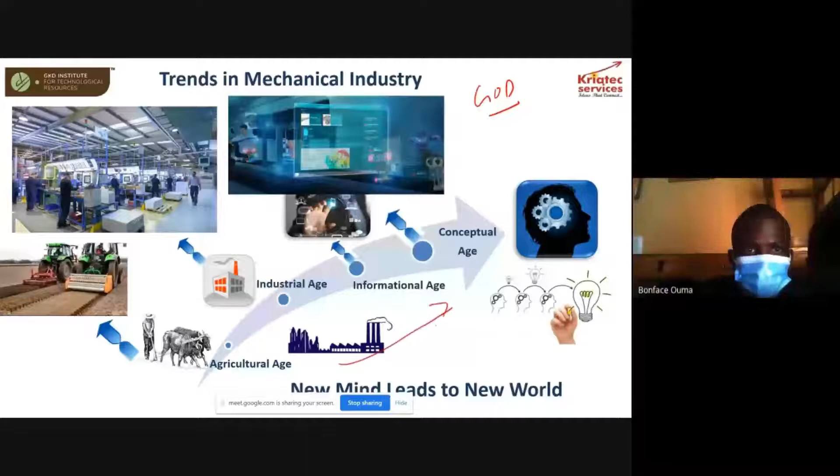Basically, you take anything - maybe starting with CAM, or maybe banking, any area you take - it's the information age that started.

Today, in 2020, we are into the conceptual age. As Mr. Bala rightly pointed out, we are into the pandemic age. Earlier, to identify or invent a vaccine, it would take a decade, 10 years. But today we are able to produce one within a year, and that's not applicable only to the pandemic situation in the medical field.

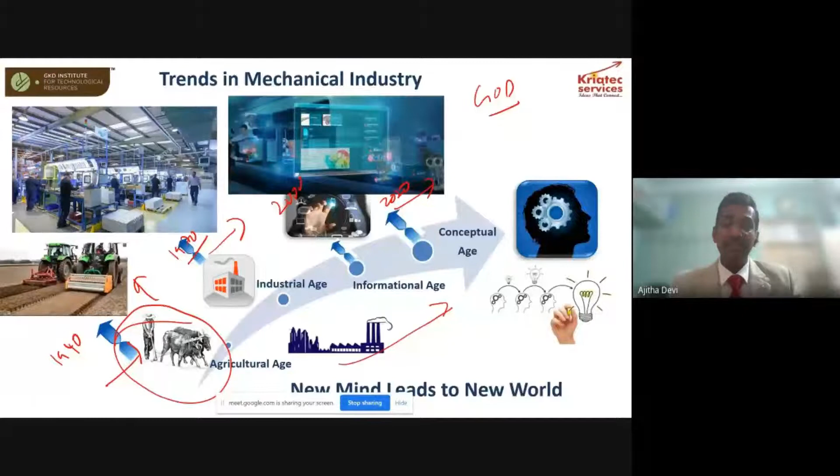If you take any field, you are into the conceptual age. If you have an idea, the same can be manufactured. Mechanical engineers are really great here - if you have an idea, it has to be produced. It's called a product. How can you produce a part? That's called new product development. You have the idea, you've done fantastic design engineering, a CAD or an engineering drawing - everything is made. Then it has to be produced as a part. The parts can be manufactured in various methods, but predominantly industry uses four types.

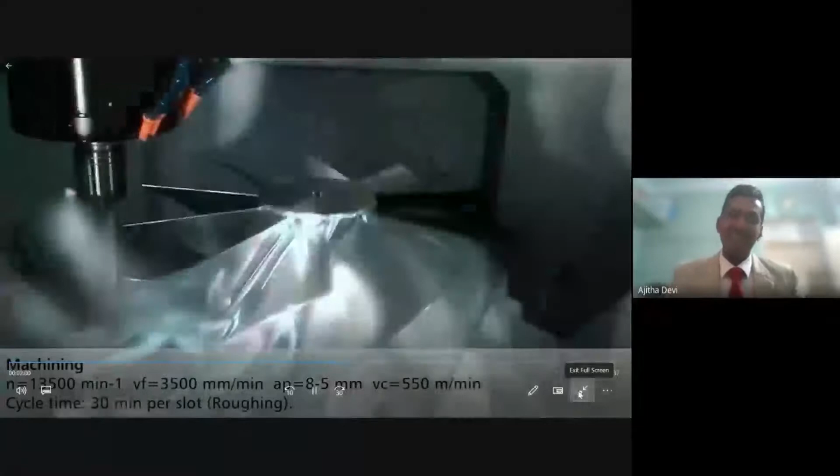Then metal cutting - I'd say around 70% of the industry uses metal cutting. Let me show a small video of the latest trend, what we call 5-axis and all the latest technologies. Generally, people still do the rough machining with a basic 3-axis machine, and in finishing applications like 5-axis, you cannot apply more load - it's only for finishing. So these are some common things you can never eliminate, still needing 3-axis. You can add 5-axis, but it's very important to keep a basic 3-axis machine too, because you cannot give more load - imagine on 5-axis, all the clutches would be free. So that's very important. When you're into modern manufacturing, you have to be careful and always remember some basics.

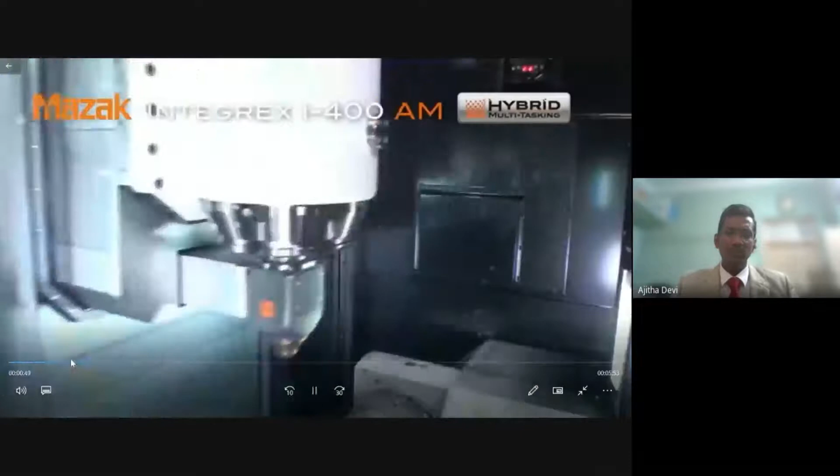The third method is metal forming - CNC punching, turret punching, a lot of progressive dies - and that could be another 20% of the market. Today the latest technology is called hybrid manufacturing. I call it the marriage between method one and two. It started coming up, and now in Europe it's very famous, and very soon you'll see it everywhere in the world. That's what I'm going to show you now, how the concept works. Earlier, both methods were separate; now they've married both, and it's called hybrid manufacturing.

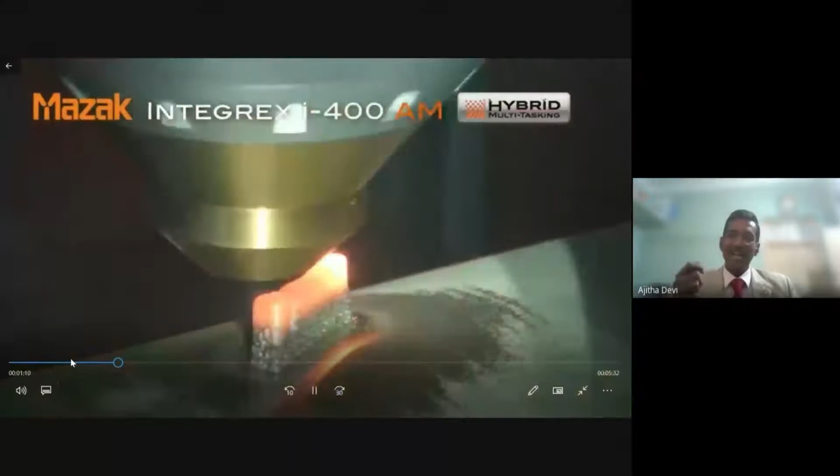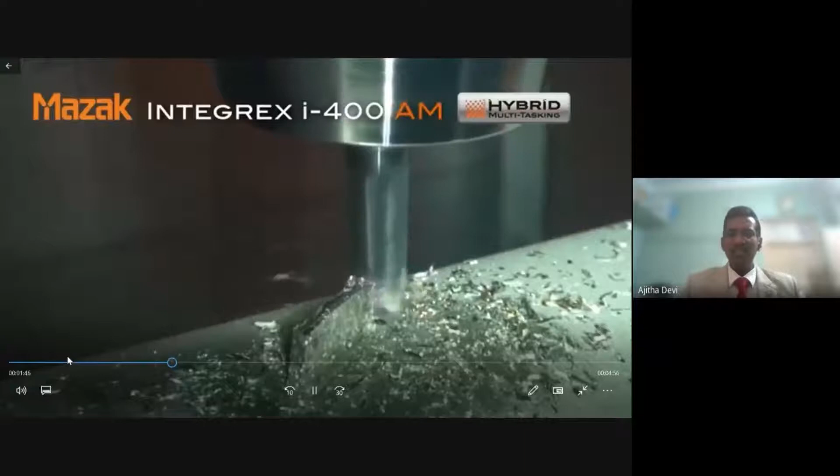There is a lot of investment, a lot of R&D going on in this, because this moves the way in which we manufacture parts. Earlier, as I said, we had to work within boundaries - we can't always call ourselves mechanical engineers and still work within boundaries, because we need to work with the machines we have. Just imagine, see this - it's now adding material, then removing it. I'm showing this as just an example.

A lot of machine tool builders started doing research on this. There are some challenges, definitely, but we have to overcome all this. The future is going to be hybrid manufacturing.

Today it's contributing around 5 to 7%. In the future, you can see it adds more into the conceptual age, as we're all moving into the conceptual age. You're adding material and removing material. Let me show this without spending too much time.

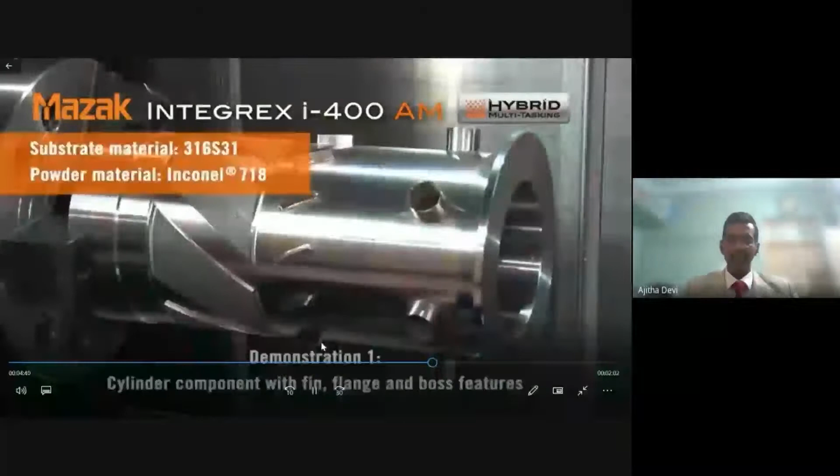This is a concept I'd like to explain. Let me show the outcome, finally, how it looks. This is the part. I'm moving this, see, this is the part. Imagine this part has to be manufactured using the traditional method, it takes time, and that's why people always introduce hybrid manufacturing.

As I said, this may contribute the balance amount of 7%. People expect this 7% to grow in future, depending on 12% to 25%, but it depends on how the industry takes it or what the industry challenges are.

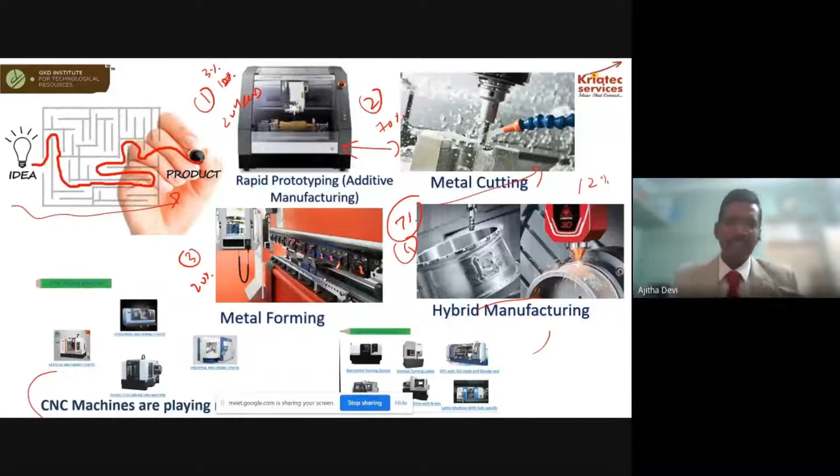At present, CNC machines are doing the major role. Now, if you want to produce a part in CNC manufacturing, what are the steps? I call this the 4-wheel.

Somebody is trying to say that you can try anything, but if you want to do new product development, you should have a 4-wheel. If one wheel goes down, you cannot produce a part. This is like a 4-wheel in a car, or any moving object, you need this. First is process planning, second is fixture design, third is cutting tool selection, and then CAM and SOP.

Let us go in detail. Let me put forward new product development challenges. I put this as the tip of the iceberg.

The reason is, if you are running a factory or working anywhere, people will see the outside. On-time delivery is a challenge. Rejection is a challenge. Whenever a customer asks for a product by tomorrow and you're unable to supply it, there's an unforeseen reason. It's not like something is wrong deliberately. If there's a rejection in your NPD, there are reasons, hidden like the tip of the iceberg, you can see all these errors.

Process planning error, more setup time, that's the reason you are delaying the part.

Unexpected accidents, imagine sometimes it goes and hits something, that's a challenge, and some sudden accident happens. Even as an entire humanity, we got hit by the COVID pandemic, and look how much time we are taking. Imagine the same way, if there's a car accident or an accident in the machine, it takes time.

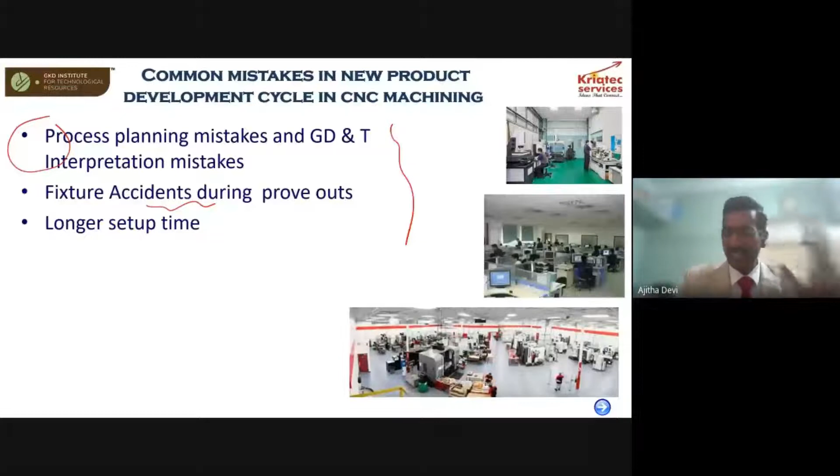Fixture accidents during prove-out, and longer setup time, that's a big challenge. How can you avoid it? Let me start one by one. We are trying to address all this, how you're going to overcome it.

That's the objective. I'd like to hand it over to my colleague Ravi, who is joining from Bangalore. Ravi sir, is it possible for you to take over the session while I move the slides for a couple of minutes? Definitely, sir, definitely. Thank you, sir, thank you for the opportunity.

I'd like to talk about this one. It's a simple flange coupling, which you can see in common valve applications as well as day-to-day regular manufacturing parts. In this drawing, how do we plan the processes? You can machine it both ways, either the top side as the first setting or the bottom side as the first setting. That doesn't matter, you can machine the part either way. But before deciding which side to machine first, you need to see the drawing carefully and understand all the important GD&T symbols given there.

You can see here datum A is given, so that is going to be the key here. With respect to datum A, they are trying to control the bore as well as the ID groove on this side and on the bottom side as well. So in this area, what I would suggest is, since datum A is given on the top side, I'll be machining the top side first, so that I can machine that particular area.

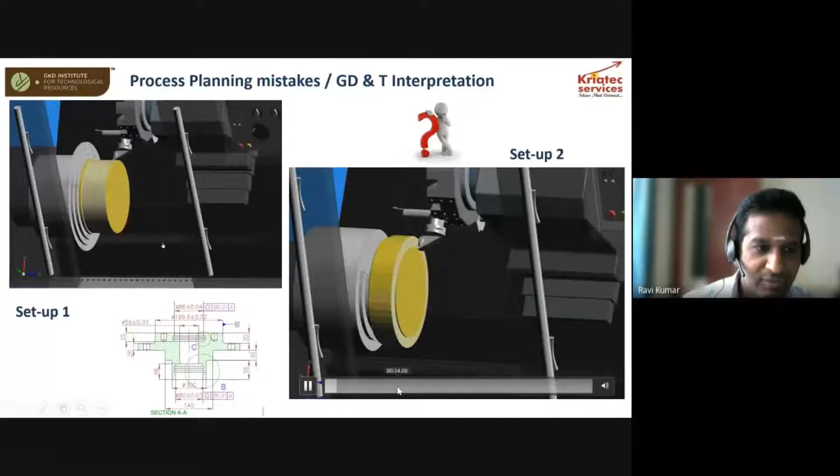You can see in the simulation, I think it's the wrong one. It's done in the other way, like the opposite side is done first, and they are measuring datum A on the second side.

Of course, you can measure the part and you can manufacture the part. I'm not saying it's not possible, but the thing is the repeatability and the confidence which you are getting with the part, like getting it right the first time when you are machining the part - that will happen only if you are properly following the GD&T symbol.

So when datum A is given here as tightly toleranced, I'll try to measure this area, and during the same setting, I'll measure this bore diameter 86, which is also concentric with respect to datum A, and I'll measure the grooves which are all given in detail C, that is the diameter 96 mm groove.

And in the second operation, I can grip using the soft jaws on datum A, and I can measure the opposite end so that I can make sure that the diameter 80 mm is also concentric, as well as the grooves which are given in detail B are also concentric.

So this plays a key role. If you are doing it in the opposite way, the entire process will get upset, and there is no assurance that all the 100 parts or 1000 parts which you are going to manufacture will be produced within the given concentricity.

So Ravi, can I take it that there is always a guideline that wherever there is a datum, that has to be machined first? Am I right? Yes, sir. It depends upon the relativity, like the relationship, how it is being established.

So this is like a key. Once you control the datum first, then with respect to that datum, whatever dimensions are given, you need to use that datum as a gripping point. So with respect to that, you are measuring the other related features, and you can make sure that your part will be manufactured at the same tolerance value even for n number of times. So this is like a basic step which I can tell you.

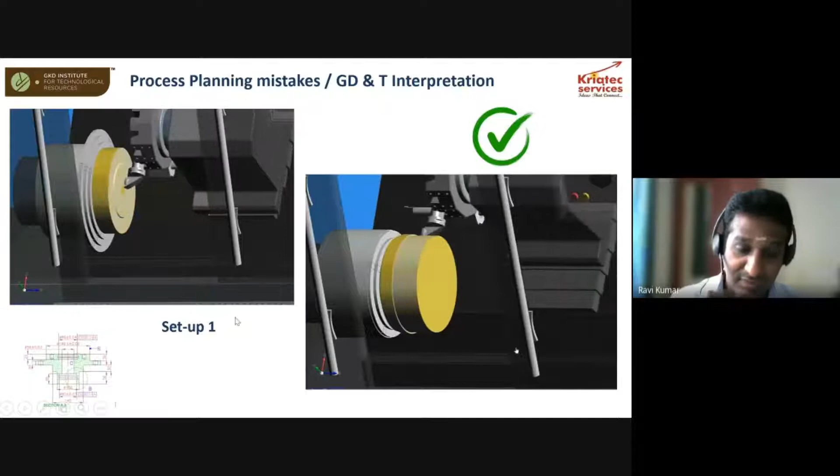Similar to this, for each and every part, perpendicularity symbol and other GD&T symbols need to be observed very, very carefully, and accordingly you need to plan the sequence of machining operations so that we can ensure that the part is manufactured without any issues. So this is very important for process planning, that GD&T needs to be properly interpreted. We need to be well equipped with GD&T symbols.

Yeah, thanks a lot. This is the right process, I think, sir. This is the right process which we defined. Ravi, thanks a lot for giving this tip, what I can call the tip of the iceberg. One gray area which we found.

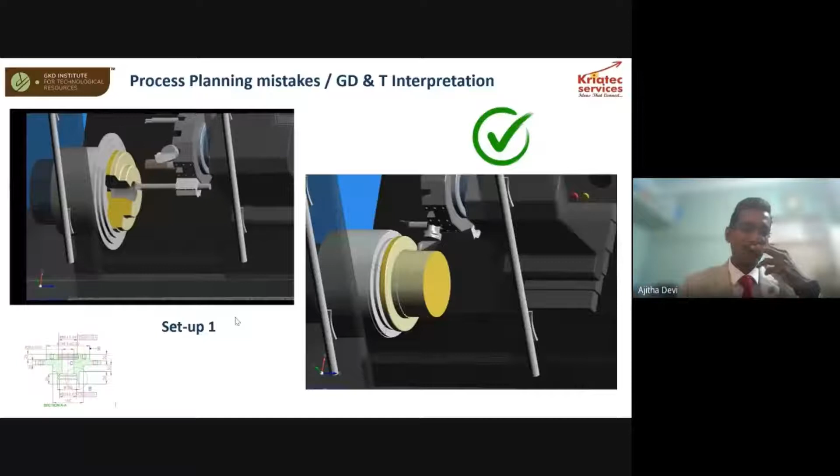What happens is there's still no automation method available. A human has to understand the drawing, and whether you are from Kenya, whether you are from Japan, or anywhere in the world, the beauty is that only two standards are being followed. Am I right, Ravi? Maybe you could give a thought on this - anywhere, the drawing is the same. Yes, sir, it's the same only, sir.

There are two standards: one is ISO and another is ASME. These two standards guide GD&T completely, and everyone follows one of them. In the US, they follow ASME, and the rest of the world follows ISO. Both are almost close together, and once we start following these standards, you can read any drawing created internationally - you will not see any differences at all.

Yeah, fantastic, thanks a lot Ravi. Once again, as I said, it's very important for us to study this first important thing - common mistakes in new product development, which is process planning mistakes. There is no other way. Ravi, is there any other way we can use some software, or is there any other technology we can use?

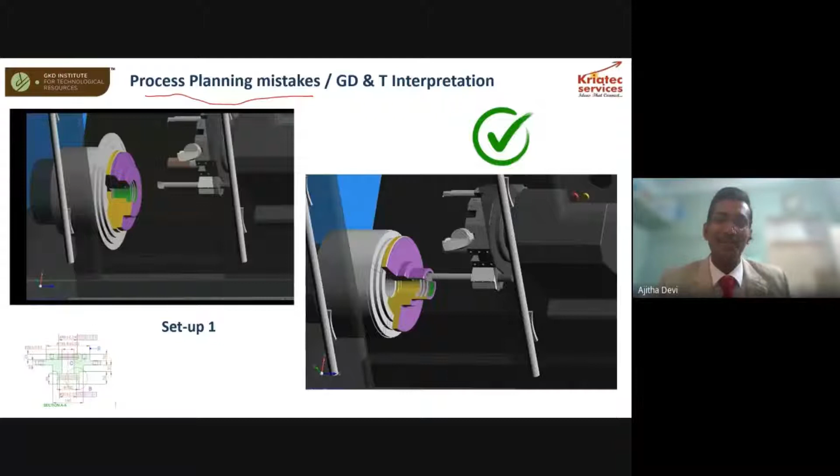Can that be done automatically, or only human has to do it? Process planning can be automated, sir, but not for the first time job. If you have a repeated job, similar parts - say I have a flange A and similarly a flange B - everything will be the same.

Then you can create a template and do it, but we can't expect that to happen every day. Ravi was involved in working earlier with a company called British Engines, and Ravi, if you could give a few thoughts, then we can move to the next one. I was working in British Engines. It was a valve manufacturing company, and for the last four years they started manufacturing heavy engineering activities.

So we started widening our scope. We used to see day-to-day activities like nuclear, solar, everything was involved, so you'll not see anything repeatedly. Initially for valves we were able to do some standardization, I think up to 2016 or 17. After that, they started widening the area, and we couldn't find any repeatability. I was also working with Lakshmi Machine Works from 2005 to 2009, in Unit 1 LMW.

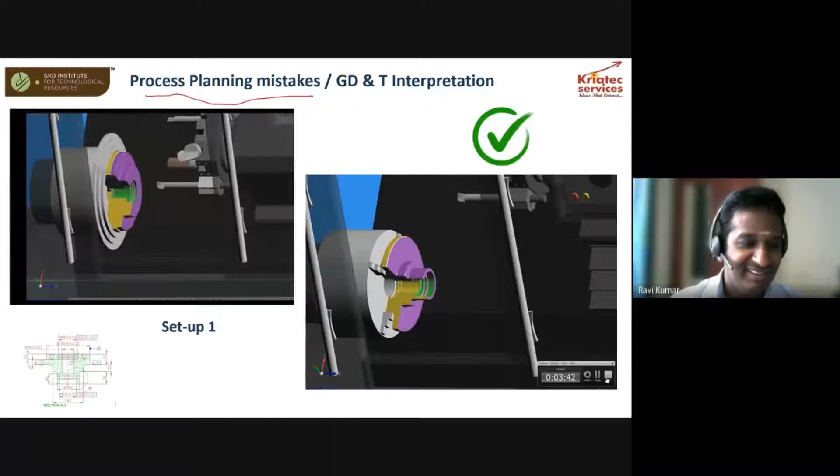Fantastic, Ravi. So what we are trying to say is process planning mistakes can be avoided only by the human, and for that you should have a skill set in GD&T. You have to be thorough, because that's the basic point Ravi was trying to put forward with his experience - for the first time, we ought to do that properly.

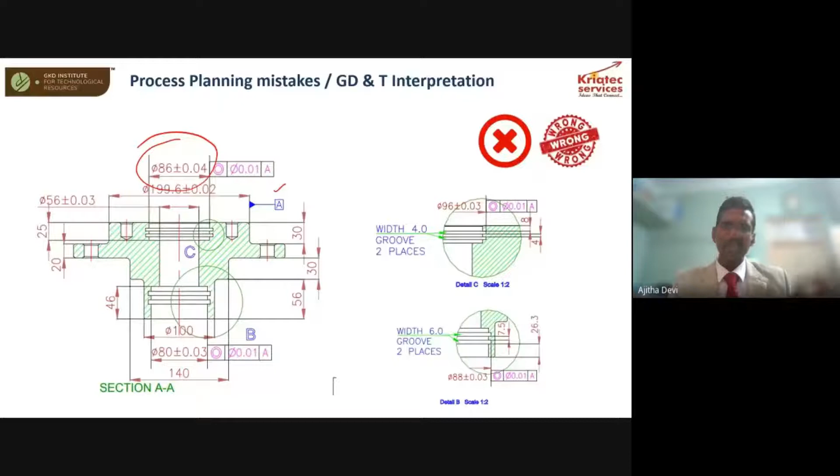Maybe for similar components we can follow the same approach, but the first time with any new product, we are laying the road. That is very important, and it looks very simple, but that's where basic fundamental mistakes can happen. Let me just put that forward, as Ravi put very clearly.

Next, we are moving to today's topic about fixture design. It's a common myth about fixtures - people always say fixtures are used only for mass production.

Batch production can be managed with standard clamps and machine vises, whether you're doing aerospace or something else. Whatever you call it, 'I don't need a fixture because it's a single part' - doing a fixture takes time, and fixture design is considered very difficult to learn.

We are going to break that concept in another 10-15 minutes, showing how easy it is. With me, I have a couple of other colleagues too, I'll try to pull them in - and that's a common myth.

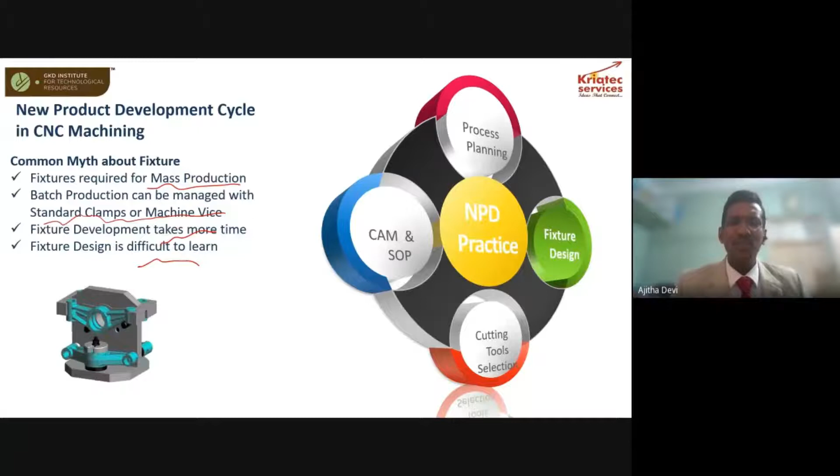Let me put forward the challenges if you use standard C-clamps. People always say, if you fail to plan, you're planning to fail. The same way, the first and foremost step, very important, is: if you are into complex manufacturing, aerospace manufacturing, thin wall manufacturing, precise manufacturing, or very expensive material manufacturing, you need a fixture. Let me explain.

If you use a standard C-clamp or anything similar, what will happen? Imagine this is the figure - let me start with the vise. I'm trying to manufacture this, and finally I'm going to show you how it can be done easily with a fixture.

Now, on the vise, I'm going to clamp it in a CNC machine. It looks good, doing the operation - I've clamped it, it's started drilling. After some time, what happened? Oh, unfortunately, 'operation success, patient died' - the component tilted. That's what happens if you start using a vise like this - it's not good.

I'm going to use some standard C-clamps instead. I'm trying to hold this component like this. Then when I try to do the drilling, the component may try to move around, because with a hand you can only tighten so much, and there's a possibility that only the peak point is touching. Now I started doing the drill, and it started rotating.

Okay, I'm going to give more force - I've done more turning. What happened? You can see the mark on the component. If you try to tighten more, and this is a component with less wall thickness, you'll have issues like this. We did this - I remember with one of my colleagues here, our partner Alexander, when trying to do the operation, the component finally got twisted like this.

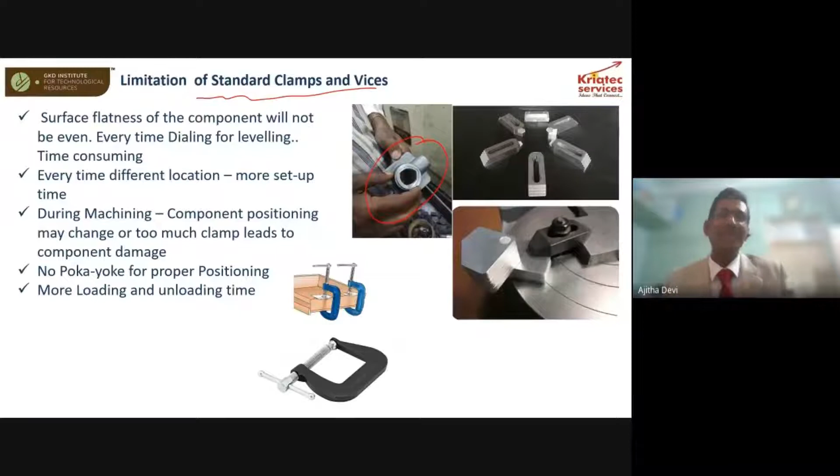Even when you try to grip a thin wall component on the lathe without a fixture using standard clamps, this happens. So whenever you are manufacturing a new part, say goodbye to all standard clamps. Please use a fixture. Fixture design is no more difficult to learn. In another 15 minutes, we are going to see how easy it is to do a fixture, and once again we will show how easy it is.

First, when you try to use standard clamps, surface flatness will not be good. You have to use a dial, adjust it, and keep dialing. It's a cumbersome process.

And every time the location is different. We are human beings. When I try to load the component, the first time I load it here, the second time I load it down. It is very difficult to do exactly the same location every time - that's a challenge. Similarly, it becomes very difficult to write a program, whether manual programming or CAM programming. Only when the position is the same can you do repeated machining.

Finally, you can end up doing ulta loading - it's called no poka-yoke. I'm going to show you how to arrest this. Poka-yoke means you can load the component the wrong way also. It's a Japanese word - everybody knows poka-yoke, it's a foolproof method.

And the final challenge is more loading and unloading time. So my takeaway for whoever is attending this course is: henceforth, for any part you are manufacturing, take even 2 or 3 days, but develop a good fixture. Today technology allows this to be manufactured quickly. Earlier, to build even one home construction took 1 year. Today you can do it within 3 months - there are technologies and machines available. Likewise, today technologies are available so you can produce a part very quickly using rapid prototyping, additive manufacturing, metal cutting, or metal forming - whatever I mentioned, everything can be done.

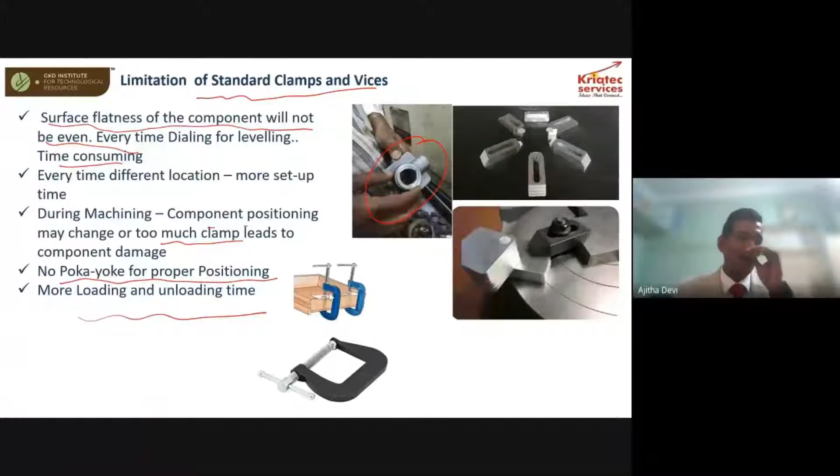I have one of my friends who is a manufacturer of fixtures, Mr. Alexander from WW Engineering. Can you please say how long it takes to produce a fixture? Around 1 week. Fantastic - that's it. What we are trying to say is, within a week you are able to produce a fixture, whether it is complex or medium range. Today you can pull the resources, but the first time it will be right.

Let me put forward what is the purpose of a fixture. The objective is how you can achieve perfectness. The concept is very simple. Whether you are using manual clamping, there are different types of clamps available - I can say fixtures are available.

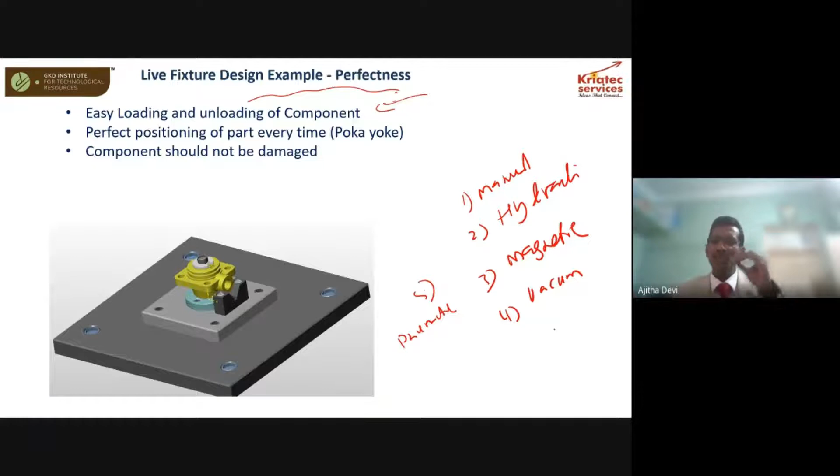First is manual clamping, second is hydraulic clamping, third is magnetic clamping, fourth is vacuum clamping, and fifth - I forgot, but still - pneumatic clamping. Predominantly, all of these are widely used. Whether vacuum clamping, magnetic clamping, or hydraulic clamping, all these serve three basic purposes. As people always say when playing football, if you lost the match, you have to go back to the basics - there's a basic reason for that.

The same way, whether you use any of these 5 types of fixtures, the first purpose is easy loading and unloading of the component to be mentioned. If you try to do too complex things and are unable to load or unload the component, what is the fun of it?

The second purpose is perfect positioning every time. Whenever I'm loading, I'm trying to position it - I'll show you all this. Whenever I try to position the component, it should always be poka-yoke - I cannot load it in a wrong way. The third purpose, which is very important, is that during machining the component should not get damaged.

It could be more clamp, it could be any accident due to wrong design of fixture. That's basically 3 benefits which you are going to see.

Now I'm going to address what is the simple way of doing it. As I say, concepts remain same, whether it is an aerospace part, an automobile component, textile machinery, heavy engineering, or precise manufacturing. Fixture design concepts are same, just like engineering drawing is same. The same way, the concept of fixture design is same.

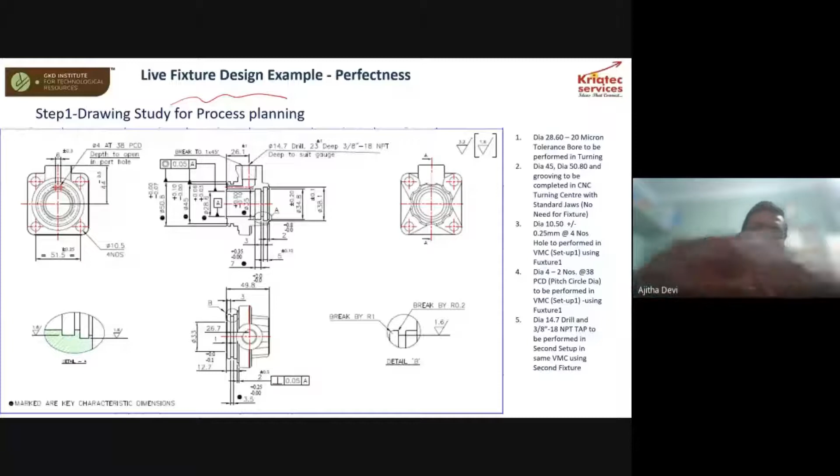The basic, first and foremost step is drawing study for process planning. First of all, I should know, read the drawing, how many steps I can do. This is a drawing basically. Since I'm not going to go in detail, as Ravi already explained one thing in detail, I don't want to dig in detail. You're all engineers, you know how to do this.

I need to take reading the drawing, compare with casting, whether the raw material can be a casting or bar stock or whatever, and compare the input and output material, to decide what operations I can do. The first is process planning.

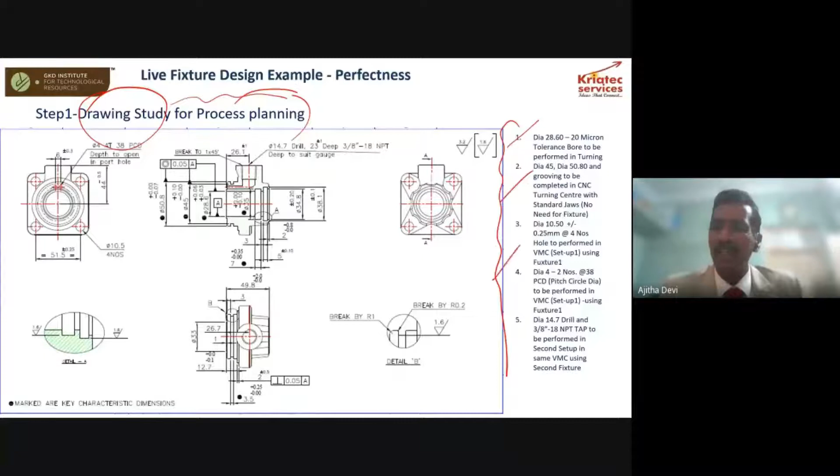Then I need to plan a machine. You cannot ask if you have an apple tree, you cannot ask for orange tree. Same way, if you're having a 3-axis machine or 5-axis machine, you cannot ask for turn mill. Whatever you have in a company, you have to do the process planning within that limitation. I cannot say, if you want this part tomorrow, give me a turn mill with C and Y axis. The MD will fire you on the same day in the same company. So everybody cannot be perfect because we have to work within the limitation.

Likewise, first the selection of machine, the second step is very important for fixture design. For that we have to see what operations you have to perform. In this case, there is a 10.5mm, 4 holes I'm going to drill, and similarly this dia 4, 2 holes has to be done. Then this particular drill cum tapping you have to do.

But can we use the same machine? That's the million dollar question I'm going to answer. If you have a 4-axis machine, you can do it within a single setup. If you're having a 3-axis machine, you have to do 2 setups. That also a human has to decide.

Let me go in detail. Type of fixture is needed, as already pointed out, and how many fixtures you need, based on the machine. First is your process, then the machine, then you decide based on the machine. If I'm having a 4-axis, all these operations can be clubbed into one setup. In case I only have a 3-axis machine, I cannot ask my MD to please invest 5 lakh rupees for an additional 4-axis rotary table just so I can do this - that would be a stupid thing.

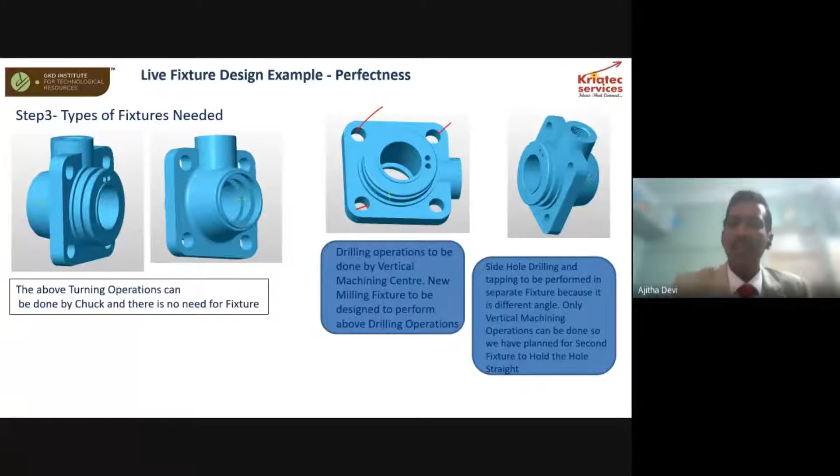So we can go with 2 setups. Now we are going to design the fixture which is going to do this 4 drill and this 2 drill. And I'm going to go ahead with the concept - clamping can be done anyway, the same can be done with hydraulic clamping or manual clamping. In this example, we are trying to take the manual clamping method.

As I said, if you want to master fixture design, there are 4 concepts. If you design and address these, then everything is fine. I'm going to address them one by one in the next slide. I'm going to leave 2 or 1 maybe into the suspense - you can find it out, maybe your choice.

Let me just put forward. The first step is L. L - let me show a chart. What is the L? What is the L for fixture design?

What is it? Maybe you can use the chat box. You can type it in. Ravi, you can check it out whether it is correct. I'm unable to see the chat box. Okay, let me just put it forward. Still, you can see the answer.

So this is basically about leveling. One answer is leveling. Shantalingam has mentioned location as the answer. Wow, that's a good answer. That is called location, a correct, fantastic answer. Shantalingam, that's a good answer.

You did it. Let me just put it forward. If it is basically a location, what am I going to do? As I said, L is for location. I'm going to locate the component, and now how am I going to load it. When I'm going to locate the piece, it has to rest exactly on this bottom, and the same way, easy loading and unloading should be there.

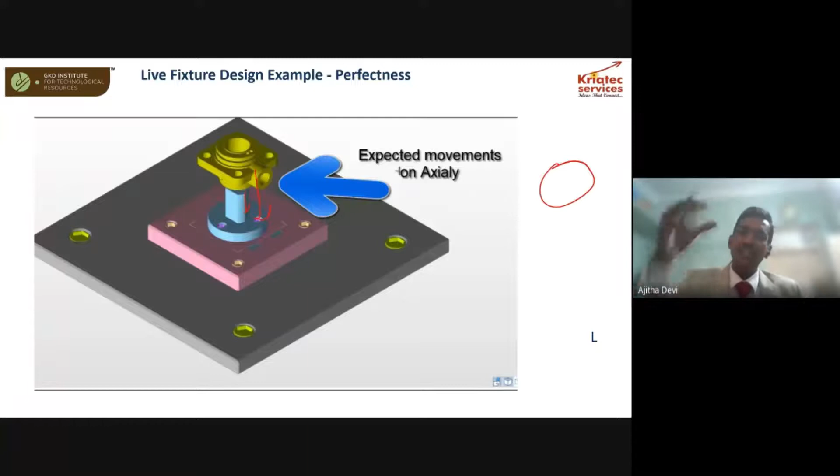If you look here, the location should be very easy, a very smooth entrance. That's the first answer: L is location. You have to load the component, and you have to give enough relief angle so that your component can be easily loaded. That's the first principle.

And the second one is O. Any answer from the group? Well, I can do it in various methods. Let me answer this: orientation. O is, once again, orientation. How do I need to orient the component? I can do it in different ways.

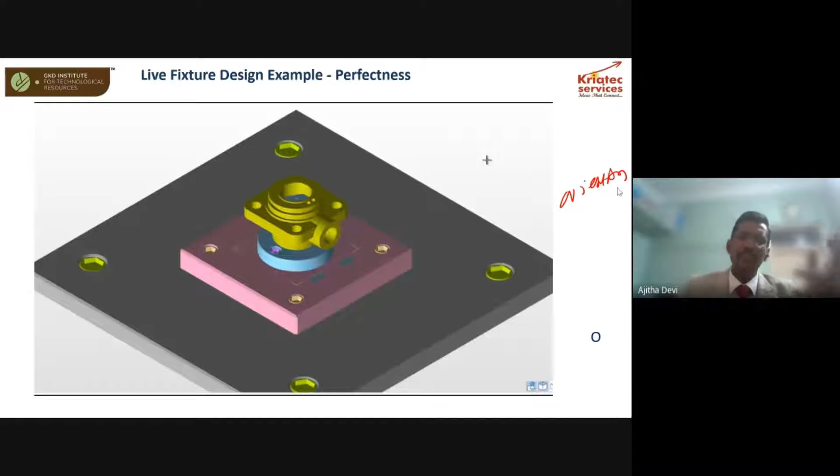I can load it like this, I can load it like this. How can I stop it? As I said, it's very simple. First is location. As I said, in the location I loaded it, then exactly it rested on this. I spotted it, because when I'm trying to do the drilling, I need to start exactly from this point.

Therefore, I need to be properly consistent every time, whether I'm closing my eyes while loading, it has to always be on the bottom. So that's called location. Orientation is, as I said, there's a possibility it may go in various directions. It can go, I can load it like this. How can I arrest it? Now I'm going to show the answer.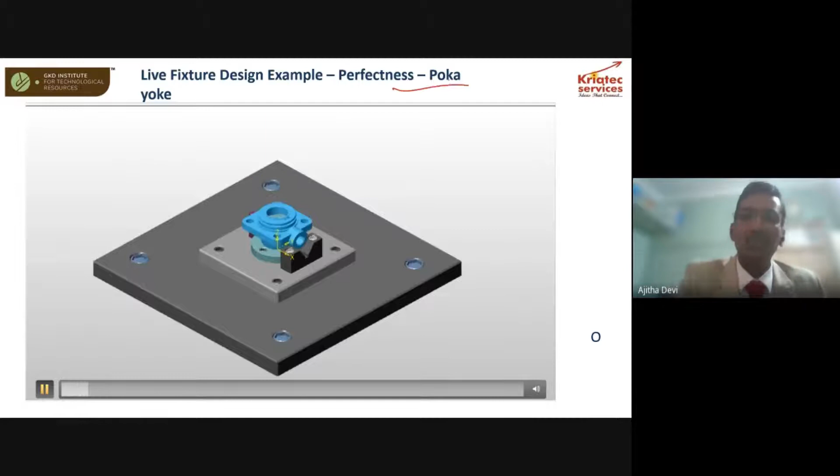This is called orientation, and here we have introduced poka-yoke also. If I could introduce here, I can load it perfectly. I'm just trying to put a stop. Here we have introduced a V block. Maybe I'm just trying to put it in, yes.

If you could look here, you're able to see we introduced a V block. Then you can load only in a certain way, the orientation will always be this particular way. You can use a V block, you can use a round pin. All this is a very innovative method. As I said, you have to address location and orientation. How can I orient this round cylindrical part? I can use a V block, I can use a U block, I can do it like this.

Then it's fine. So what's very important, as you can see here, this is basically about location. It has to be exactly on this bottom, and easy loading should be there. And we have addressed both, giving a relief, and introducing the V block in this case, and then I have done it.

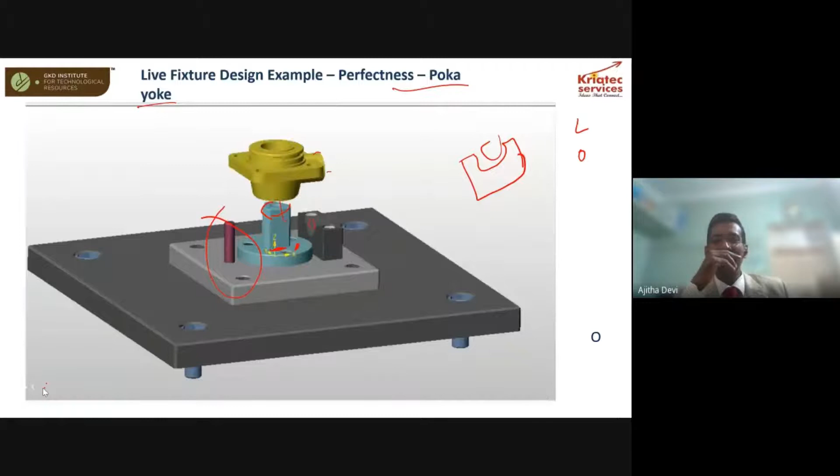If you had not introduced this pin, what would happen? I'm going to show this. Why do we introduce this pin? It's called poka-yoke. This looks very simple, but as I always say, for a complex problem, the solution is very simple. Just trying to put it in. Now I did it correctly. How? I'm a fool.

Sorry, by mistake I did. I'm trying to load this. Will it complete? No, you cannot load the part. The pin will stop you from loading it the wrong way.

Of course, people can say that. Why? I can also introduce one more pin here, and one more. If I'm not wrong, you have to introduce 3 pins basically, because the common mistake is people can load it at 90 degrees. That's where I put it.

But if your people are very new to the business or new to the machining shop, you can introduce 2 more pins also. That's the concept, and that's what we can do. Now I'm trying to do this.

Loading perfectly, this is called the foolproof method. You cannot machine it wrong, it's not butting. And then it's fine. So this is the right way of loading, and Poka-yoke has been introduced. Let me just put it here, then I can introduce further.

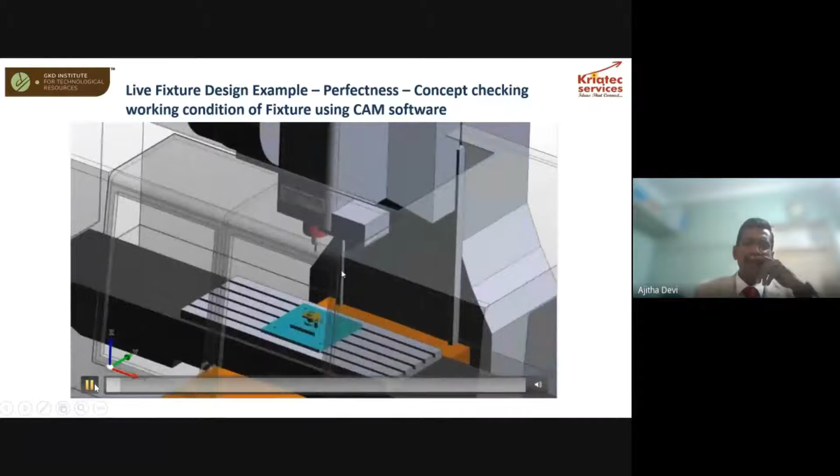Now, how can this actually be done? As I said, today technologies are available. A lot of CAD/CAM started playing the major role. Once my concept is right, then I can check my concept. No need to go and do the trial in the machine. You can do the trial in the CAD/CAM itself, in the computer itself.

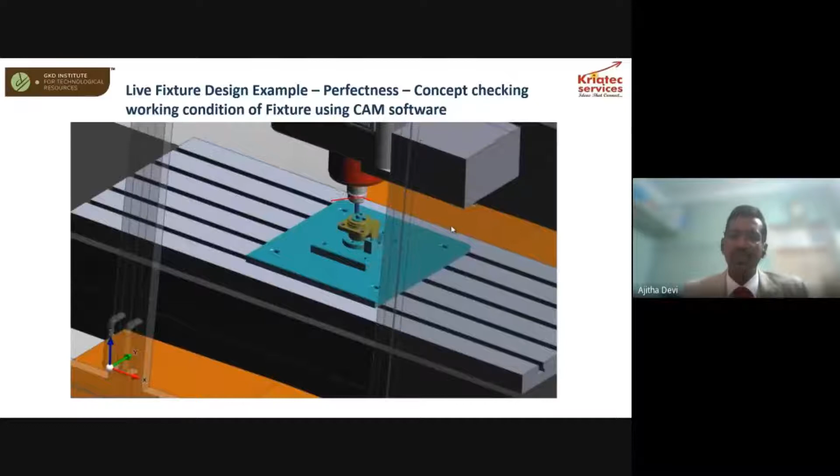Now it's going to do the drilling accident-free. As I said, one of the major problems during trial is accident happening in the machine. The reason may be wrong fixture design, or the tool holder may hit here, or other things—you can overcome all this. In this case, I'm trying to do manual clamping, which is called a C washer, but you can do it whatever way you want. You can introduce hydraulic clamping, vacuum clamping, but the concept remains the same.

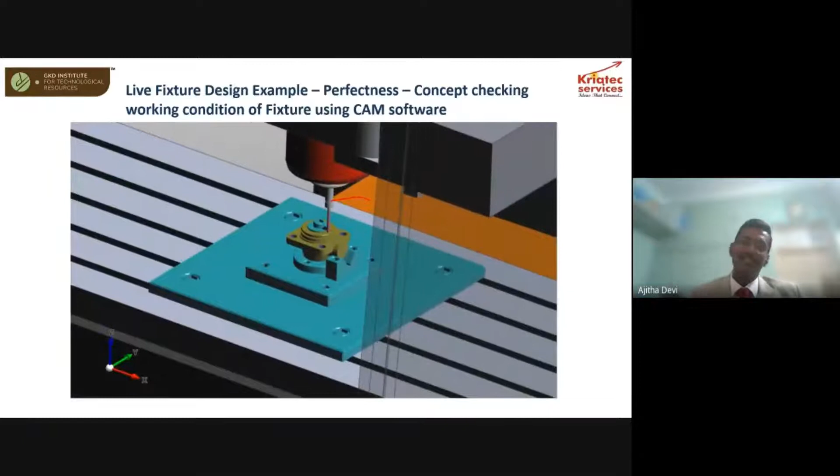For now, I'm trying to do 2 drills. We haven't gone much into clamping and the other one, which I have not answered. You can think about it, search it in Google or anywhere, or otherwise come back to us and we'll answer what it is.

For fixture design, there are 3 concepts available: L is for location, O is for orientation, C is for clamp. The clamp only decides the way—manual clamping, hydraulic clamping—and I'm going to show you next how hydraulic clamping can be done. So this is a way of doing a design.

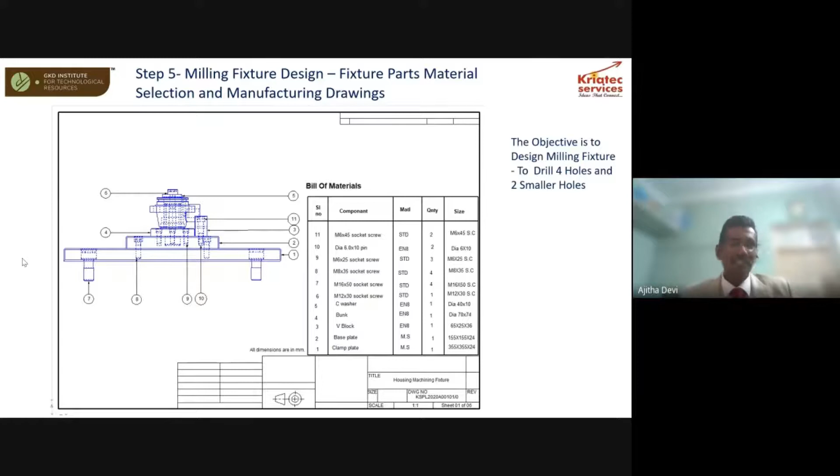Now I'm going to show you what is very important. Now I made a concept design, and that has to be proved—the proof of eating is the food. If you cook something, you have to eat it. The same way, if you've done a fixture design, you need to know how to do the manufacturing drawing of the fixture. The first and foremost step is to do the manufacturing assembly drawing.

That's basic, everyone should know how to do the basic assembly drawing. Then you have to do a part drawing. If you look at this, even for the base plate, you can see how much detail. Sorry, I'm trying to zoom it. Oh dear, it's not happening. That's fine, I'm trying to zoom it a little.

Okay, fine, it's fine. If you look here, I put this datum as Ravi mentioned. Oh Ravi, even in fixture design also we are using all the GD&T. Ravi, is it necessary? Definitely, it's required, sir, for any manufacturing part, whether it's a fixture or a component. Just for making it fun, I'm introducing Ravi—thanks a lot, Ravi.

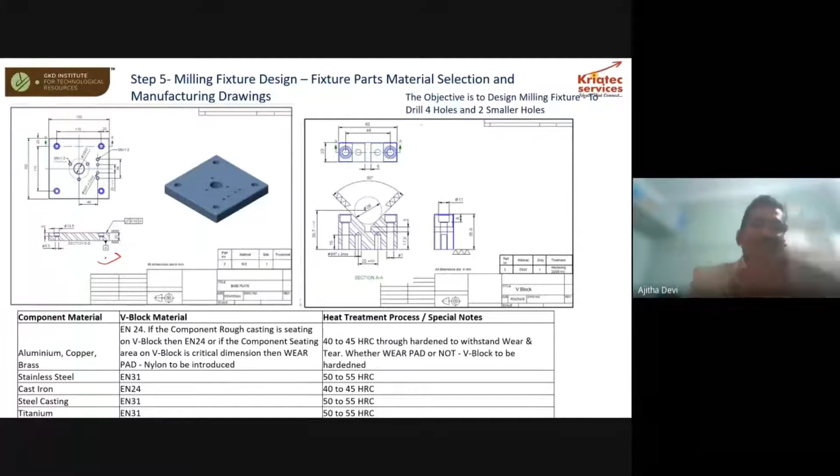If you look at it, even to manufacture a base plate, I need a datum. Overall it looks very simple, but even for fixture manufacturing, you need to do the proper planning.

That's why I've introduced this datum—here a grinding symbol, there a grinding symbol—because I want to load every time in a correct position. Whenever I'm trying to load this part, it should always be consistent, it should not be off like this, and the component will rest only on this part. Every time you load it, whether 1,000 times or 1 lakh times, it has to be the same.

That's very important. You have to do the grinding here and here. What are the further assembly parts you have to do? You have to follow here. There's a symbol of parallelism again. All this you have to maintain. Let me come forward.

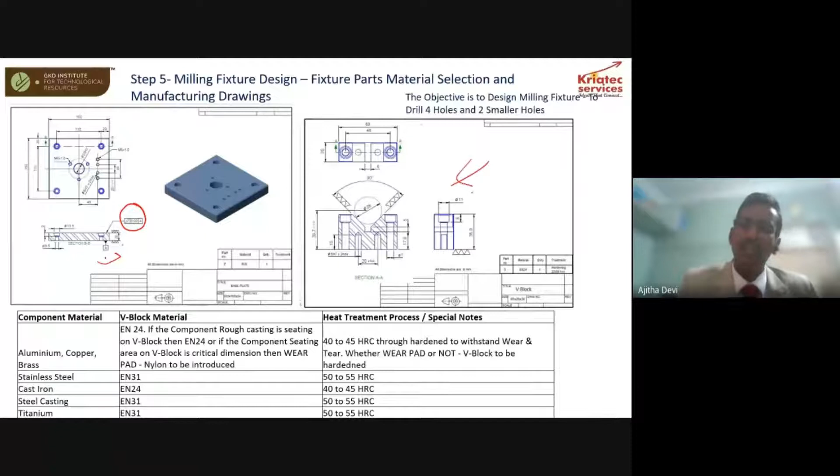I'll not explain much of the other part. Let me put forward a V block, because in the orientation we discussed, the V block is very important. See how important it is. Here's also a grinding symbol, because it's going to come and assemble here directly.

The same way, if you look here, the material plays a major role. Fixture parts material planning is very, very important. If your component material is aluminum, then the V block material is different, EN24. If your component material is titanium, you're into aerospace, and that's it, very simple.

Fixture design, whether it is aerospace or precision, the first and most basic thing depends upon your component material, the particular fixture part. Why we have to select this material - the answer is very simple. It's going to wear and tear.

If you're driving a car, after some time you have to replace tires because the tire is getting worn out. That's a very simple example. The same way, if you're running maybe 40,000 or 50,000 kilometers, people used to change the tire of the car. Same way, if you're loading the component, every time you load it, this part may get worn out.

If you're using a soft material, what will happen? Very soon it will not even come up to 50,000. Why do people use rubber material or threaded material in a car? Sorry for explaining with a simple example, I won't explain with day-to-day examples again. So it is very important whether you are into any manufacturing.

People think, oh, aerospace is definitely a complex part, the design is a complex one. The manufacturing is the same. But what is very important is, if your component material is titanium or special grade aluminum, imagine I'm going to use a V block n number of times, or you may think I'm going to use it only 2 or 3 times.

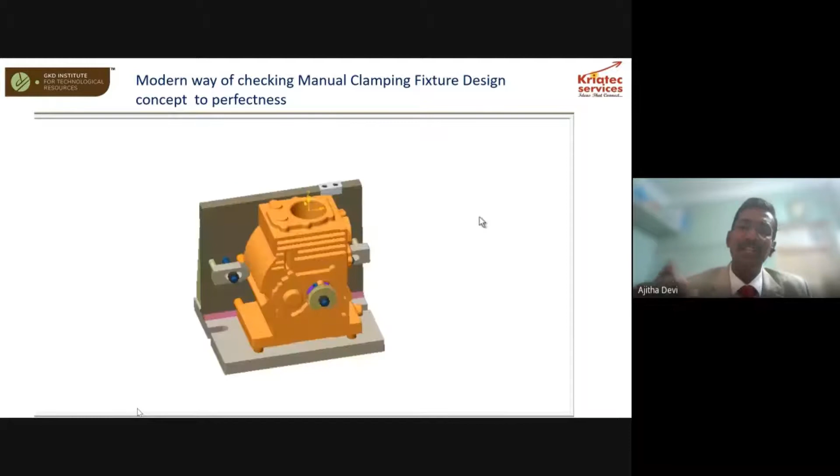This is basically an engine casing. After doing all this machining, people used to do a honing fixture. It's basically a preparatory step for honing application, which is done in very complex engine machining. The first step, as I said, is the fixture design for loading and unloading of the part.

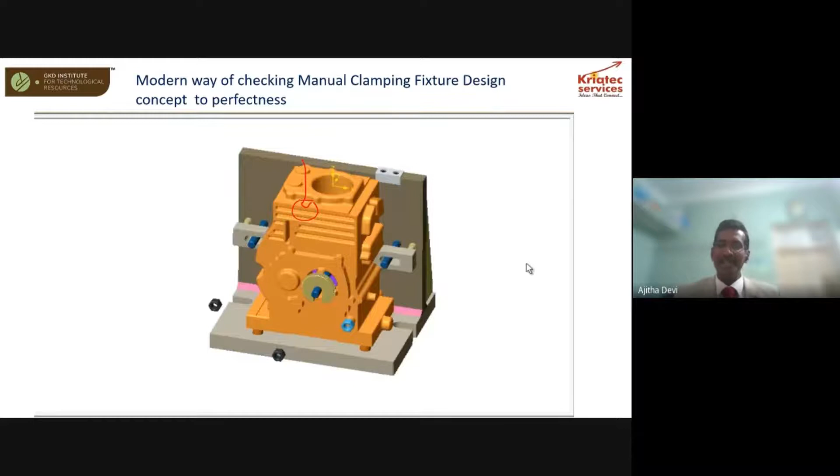Today, using CAD software, you can check everything, whether you're able to load the part without any difficulty. This is a modern way of checking. Earlier, people used to do the checking in the machine shop. I remember 20 years ago, when I was working with Rane Madras, I used to spend a trial itself. We spent 3 days on the fixture throughout, then we used to do a correction.

Today, no need. You can check everything in the CAD/CAM software and simulate. My entire process is correct, and our ultimate aim is first part right, which is very important. Let me put this forward. I'm trying to see what happens here, basically trying to see the simulation. Let me run it a little bit.

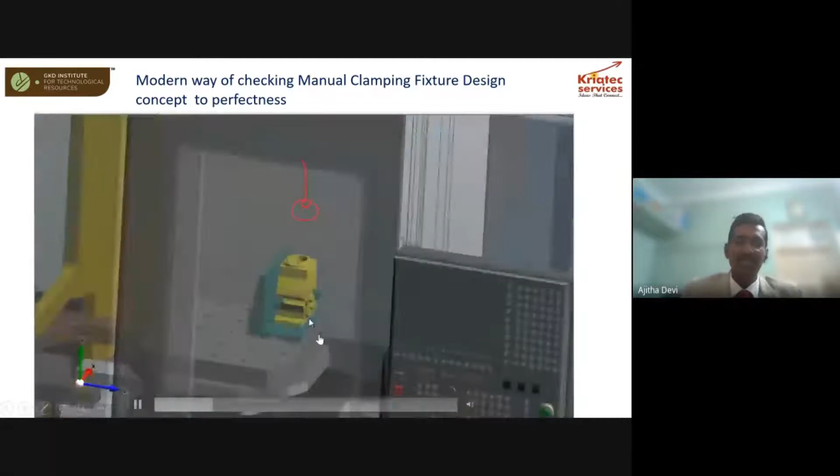It's a very big one, just to check whether it's doing this machining properly. If it's hitting with this particular clamp, you can decide there is something wrong, and all this you can check out in recent CAD/CAM software. That's the beauty of today's technology which we have in front of us.

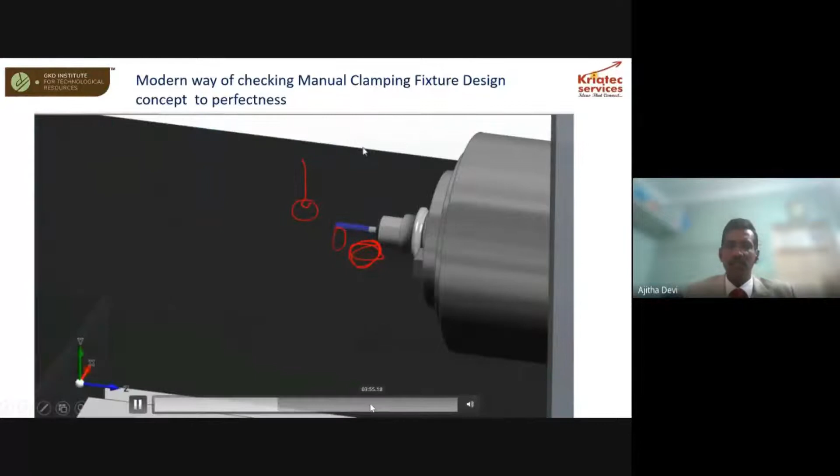Likewise, you can keep doing it. I'm doing all the steps, all the side rotations, everything you can check while rotating, whether it is hitting the part, all accident free. Once you do the checkout in the CAD/CAM software, you can understand that's called the digital world.

People call it the digital twin. No need to do the trial in the machine shop. For any new product development, spend more time in the computer and very less time in the machine shop. That's what we are trying to do, whether it's fixture design or any new product development - this is a very key role.

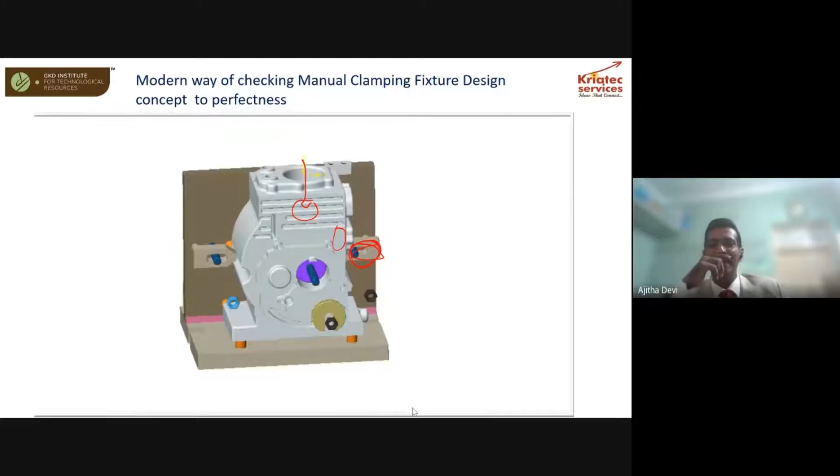Once I've done every operation, I can check here itself the unloading of the part. I've done everything. Now I'm going to see whether I'm able to unload. So that's the manual clamping way of method.

Next, I'm going to show you hydraulic clamping, how hydraulic clamping is done. Now I'm going to this particular part, I'm going to do simple face milling. You may think, why should I do the fixture? But the problem is you have to maintain the flatness within maybe 10 microns. Then you need to have these fixtures.

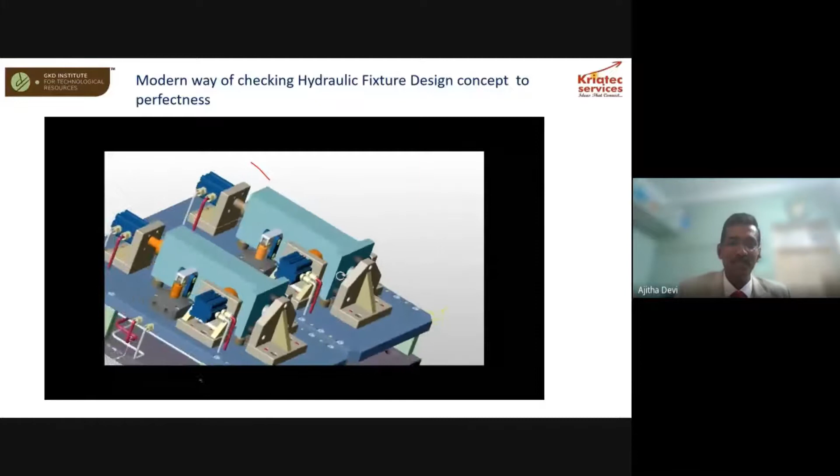Imagine how I'm doing the clamping step by step - all the clamps will be simultaneous, but for demo purposes we've done it step by step. I hope you're all able to see this. Let me run it one more time. The first one is ticking, then it is coming. Okay, parallelly all are coming, but all will come simultaneously.

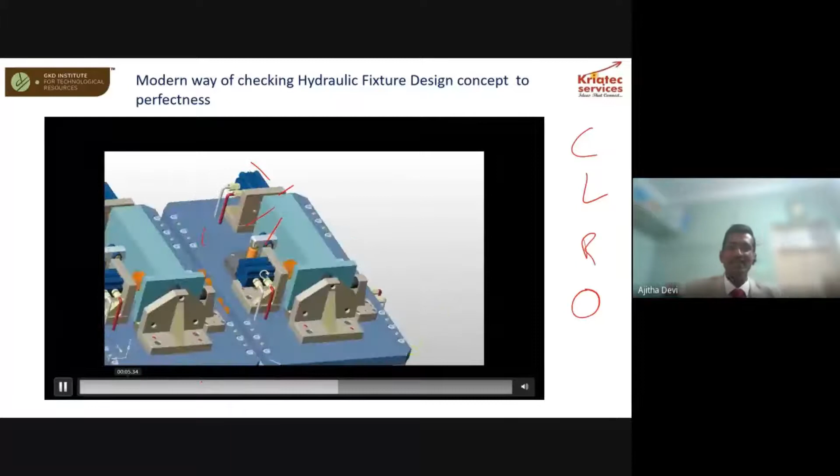So there's a purpose here also - once again, whether it's hydraulic clamping, the concept is the same: CLRO principle - location, orientation, clamping. This time I'm doing it with hydraulic clamping. That's fine, still if I'm not answered, please, it's an open question, and we can move forward.

So let me put this forward - this is a modern way of manufacturing. Now I have done loading and checking. You can see the oil flow, how it is going, which cylinder has to be clamped. All this you can check out today with the technology. Now I'm going to do machining, how it can be done.

Very simple, and this part can be machined - let's see how it's going to be done, whether when I'm doing the machining of this simple face milling, it's going to interfere with this part, any of this part - all this you can check out. That's the modern way of going from concept to perfection. I don't need to do the trial in the shop floor. Our ultimate aim is to do everything on the CAD/CAM solutions.

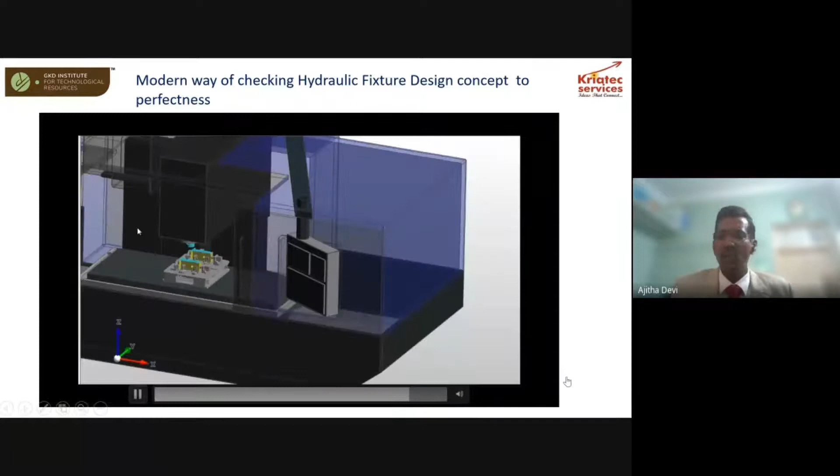Let me put forward what the next part is, which I'm not going to cover much about cutting tool and CAM because time is already at 50 minutes. About cutting tools, one word I can always say - please, wherever possible, try to use requirement-based cutting tools. Today, somebody vendor will come and supply, but you should ask, I want to go with special - how am I different? You have to question the status quo.

You imagine what is impossible. Today, anybody can imagine people trying to go to the moon like a tour. Same way, you can ask. If you're not asking, it's very simple. Therefore, you try to always look forward for combination type drills and so many things which you can do.

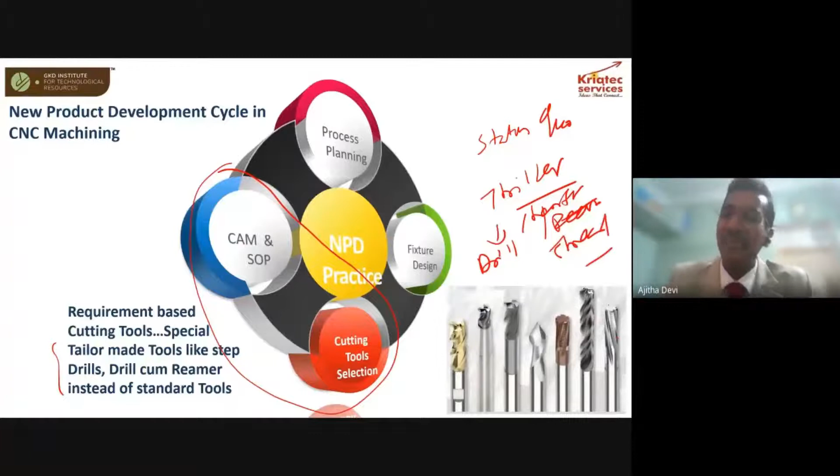Today even people call it thriller. I don't know how many of you know this tool name. Anybody answer, what is the meaning of thriller in this group? The tool name is called thriller. Ravi, is anybody answering? Or do you want me to answer? No answer, sir, you can answer I think. Okay, drill, I can say chamfer, then thread. Three operations called thriller. Sorry for just making it. It's available, tools are available.

Now coming to CAM, whatever you explained much about CAM, today every company started using CAD/CAM, and SOP is basically standard operating procedure, how we are going to load it on the machine. Now let me put forward the next agenda of the topic, which is setup time.

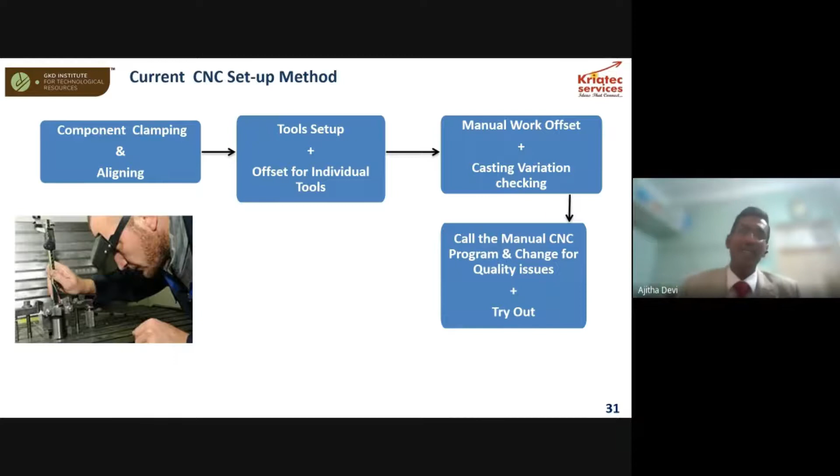Now I did everything, design is over. I manufactured the fixture. Before manufacturing the fixture, what's going to happen, I'm going to show you. Typically, if you're into the process, first you have to do the component clamping using a C clamp or standard clamp. You have to do alignment. Sorry if I tell it like that, that's where it's happening. Then tool setup.

Similarly, what we are doing is we try to do the part, then check it out in the CMM or maybe outside in the world. You use gauges and come back and try it. That's a big challenge today. As I said, this is a big headache of CNC machining setup.

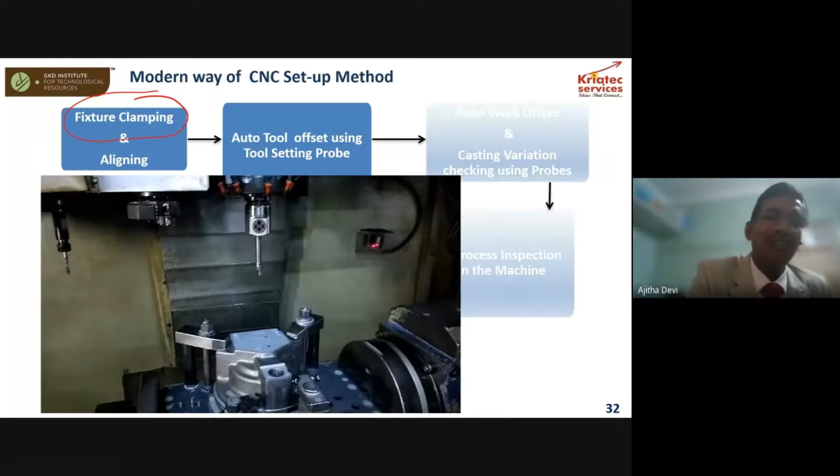Now I'm going to show you the modern way of doing it. The first step is, if you use a fixture, almost your headache is free. First headache is free for aligning, I can put it as still auto aligning. Sorry, purposefully I have not written it. You no need to worry about aligning.

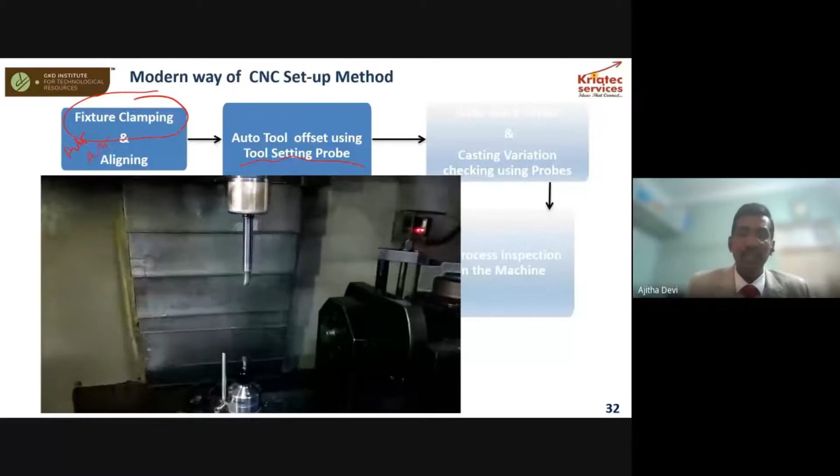The next is tool offsets. Imagine this particular part, the tools, if you use, there are tool setting probes available, which can be fitted like a cutting tool in the machine. I hope so, most of them are using it. And if you're not using it, it's a modern way of doing it. No more human intervention is needed. You use this type of tool setting probe, wherein all the offsets can be managed by the system. It's a simple electronic device.

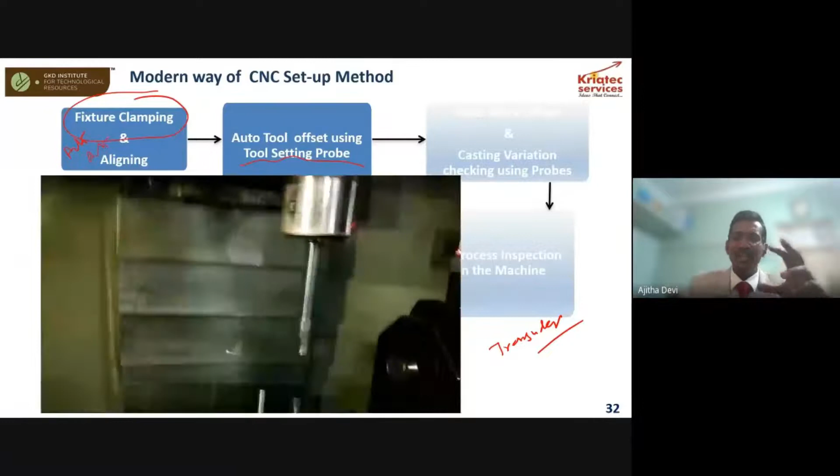It's a transducer, a simple transducer. It does a very fantastic job of monitoring. If you have 100 tools, if you have 200 tools, it manages the data, it gives automatically, offsets get updated to the machine. Goodbye to the manual way of taking offsets. It's called auto tool offset. The next method is...

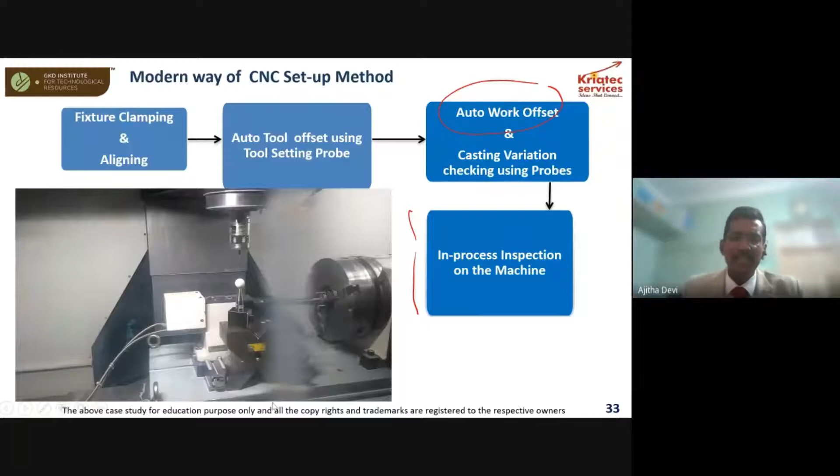Okay, a very interesting part is automatic work offset and in-process inspection. I'm going to show you, as I said, some examples from customers, for educational purpose, nothing else, just to give you the idea. So this is one aerospace component, and the big challenge is the moment you take the part out, it's done, you cannot fit it one more time, because once again, you can see that typically they're doing it in a 3-jaw chuck.

And if you want to do the correction, not impossible. What we are trying to do first is in-process inspection on the machine. If your component tolerance is about 10 micron, very easily you can go ahead with in-process inspection. You save a lot of your time.

I'm going to show you a couple of case studies in aerospace, and this is also one of the aerospace components. Whenever you are trying to do in-process inspection, you are trying to calibrate, because calibration is very important. It's doing a calibration, then finally there are 3 operations it's going to do. It's checking a position tolerance. There is one hole here, and here is the other hole. I'm going to show you how it works.

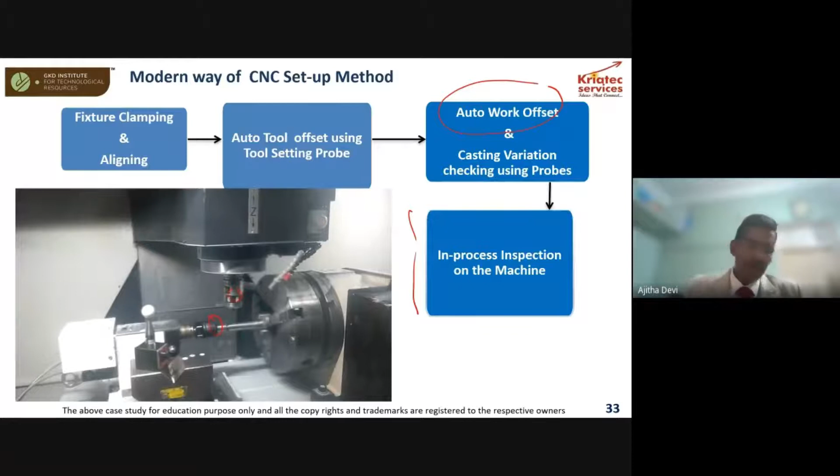After the machining is done, you are going to test this and see the result. I'm going to show the result. Imagine we are in a world where after the machining of the part is done, you can see the result - how much is the tolerance. That's the world we are in.

I recently bought a mosquito mat because I'm in my native place. Due to the pandemic, I moved, and there were a lot of mosquitoes. Even they put a quality check, okay, and we are very happy. The same way, imagine if you are producing a part and you give 100% quality satisfaction, then you will be very happy.

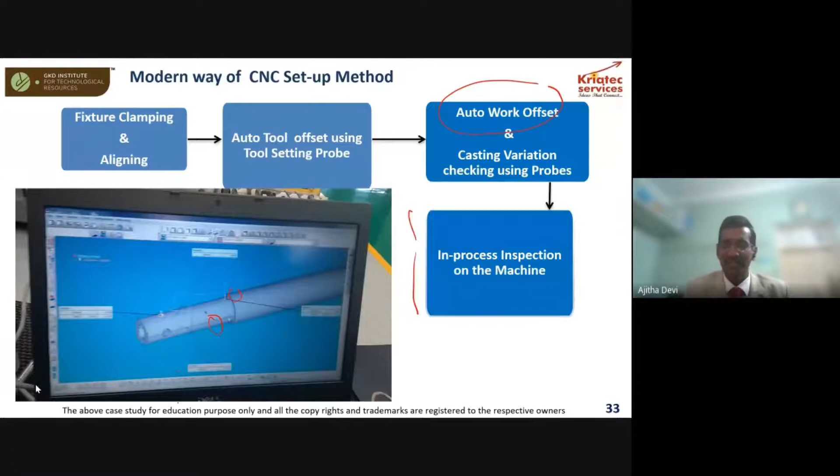That is possible only with in-process inspection, and today such technologies are being used. Now I'm going to show you one aerospace example. Again, this is for educational study purposes, nothing else. Please note BBAT Aerospace has allowed me to show this concept.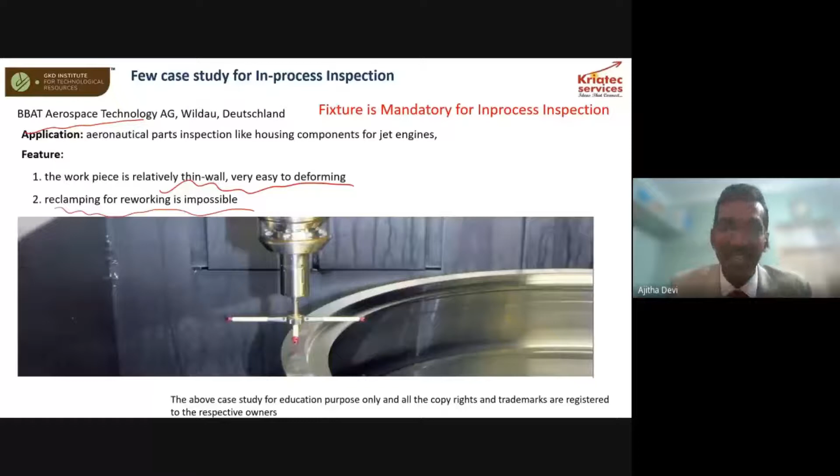Whenever you're using a thin material, thin wall, there is a challenge - it always tries to deform. Whenever you're trying to clamp in a 3-jaw chuck, or in a VTL, if you're trying to put it on without a fixture, there is a challenge. The problem is, once again, with thin clamping, when you're trying to clamp and declamp, the component may also try to shrink and expand. If your thickness is 1mm or 3mm, it's a challenge.

For this, the BBAT manufacturing company manufactures turbine rings - this is a turbine ring, for jet engines - and they use it on one machining center with touch probes and in-process inspection software. Once the machining is done, using online inspection software, we are going to verify the tolerance.

You can give a bandwidth, maybe green is 5 to 10 micron, 10 to 15 micron or 15 to 20 micron is yellow or orange, and above 20 is red. Likewise, you can check any correction without dismantling or taking off the component. You can do it, because there are methods available.

As I said, a fixture is mandatory for all this in-process inspection. This is a live aerospace example. If somebody is attending from aerospace, please think of it - henceforth, after machining is done, do the inspection in the machine itself. You can use any technology, but it's very important. Today technologies are available which you can use.

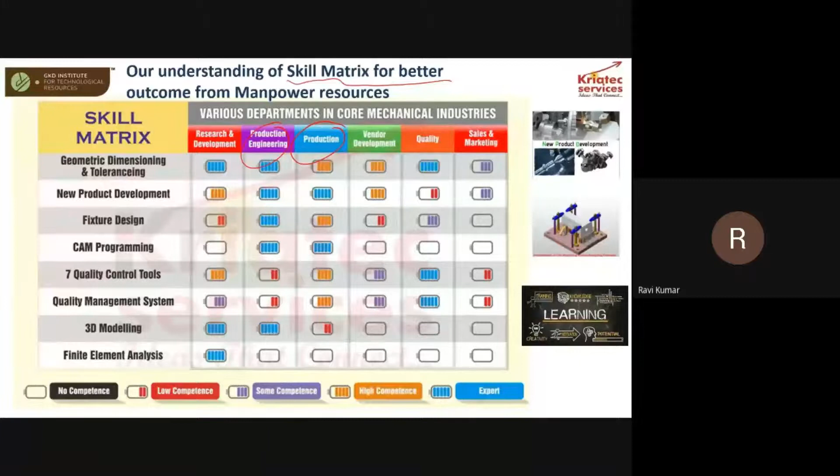Fantastic, Ravi. Thanks a lot, Ravi. In the same way, every organization should run a skill matrix, because humans are excellent resources.

People always say your machine may become old, aged, and damaged. Whether I'm using my car, after 5 years I need to change it. Or if I'm using a machine, it cannot run forever - after 5 or 6 years you have to change the machine. But humans, when they become aged, when they have gray hair like us, they become an asset to you.

That's one reason we are joining hands with GKDITR, and we are trying to populate all this. We will do GKDITR and Kriatec services jointly, a lot of exercises to improve and enhance the skill set of the manpower, try to identify new areas, how we can improve in the area of skill matrix and skill enhancement.

I'm going to share with you how we are going to do that. What is very important is, not everybody can be an expert. I'll take one example. If you are into production, or production engineering, or vendor development, it doesn't mean you have to master all, but you have to know everything.

If you're into vendor development, you should know - let me take production engineering - you should be an expert in GD&T. Whatever the drawing, any symbol, any drawing, even if you wake up from sleep, you have to answer it. In new product development, whatever the complex part, you have to do fantastic process planning - which is the first step, which is the second, all of this you are going to do.

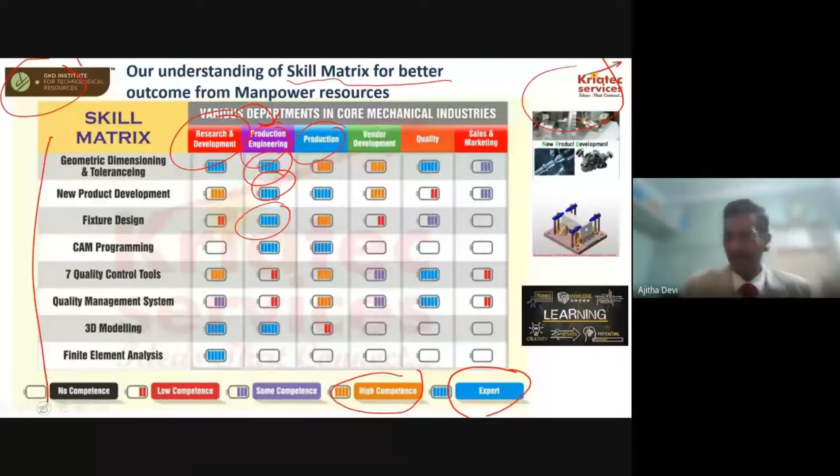That's the reason we and GKDITR are here striving to give the skill set. Whatever we listed is very few, we are trying to add many. GKDITR and Kriatec have a solution for all this. I'm going to show you the tip of the iceberg, maybe fixture design or NPD process or GD&T, explained very small in an hour, very little.

For the past 5 years we have been developing an e-learning portal jointly with GKDITR, offering courses like fixture design, hydraulic fixture design, it's a self-paced course. You can learn at your own time, and we support regular webinars like this, weekly one or two webinars. We start with GD&T, fixture design, NPD, 7QC tools, and many more.

We've been working very closely with the industries and GKDITR to move forward. It doesn't mean that if you put 3 or 4 weeks you have to complete it in that time. We give enough time, 3 months, and some of the courses are certified by AICTE, and all these courses are certified by GKD Institute and Kriatec Services. And now it's time.

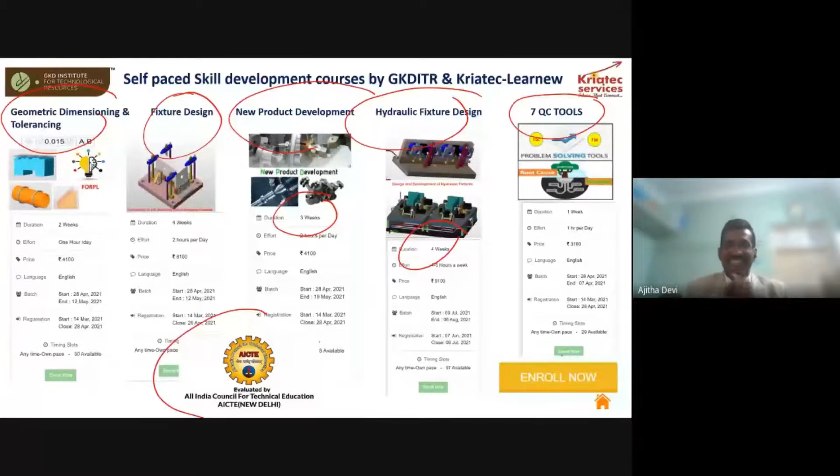Bala, anything you would like to add in this? Then I'm going to put the final session of the quiz. No, the thing is...

We're working with Kriatec very closely, more than a decade, because the first CAM interface after MasterCam we introduced with the support of EdgeCam. That has been incorporated with 5-axis also. We have given a lot of programs to various corporates. Recently with Tata Electronics also we have initiated this CNC programming. So that way we have done a lot of new programs.

I think this webinar will be like an eye opener for all the manufacturing industries to take up this NPD process. We'll be coming up with a lot of webinar series like this. Please join us. Thank you.

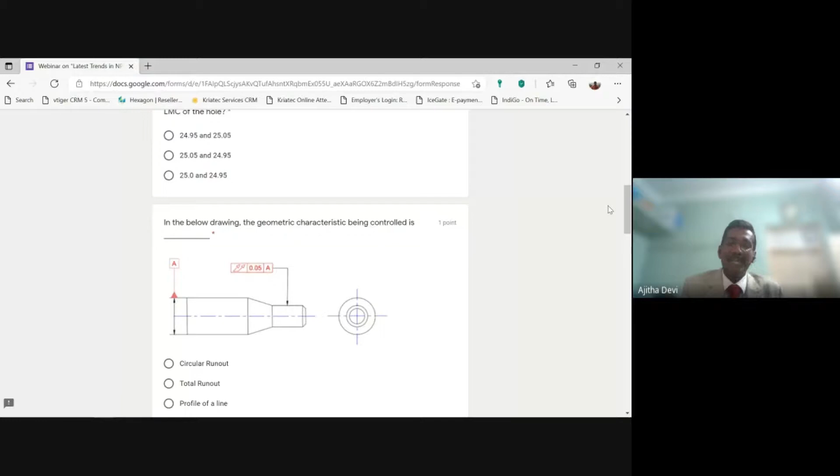We initially had a thought of giving, you can add maybe type, or you can add descriptive answers, but Mr. Bala was very curious. Bala said, 'No Ajitha, we want MCQs.' At 2 o'clock he called us and said, 'I need it has to be introduced, I need to see the results.'

I'm very happy, please answer this all, and let me parallelly also see how many of you are answering. Let me parallelly put off my screen, then I can see the answer, because I cannot show other answers to everyone, that is a secret. I'm just stopping it for a while, then I will take Q&A once everybody has submitted.

1 minute, I'm just checking. Is my screen off, Ravi? Yes sir, I'll just see everybody's done. Then we'll take Q&A. Bala will allow for a few minutes, because some of the questions are framed, 1 or 2 are tough, the rest of them are easy.

Yeah, take your time. Just allow me for a while, I'm just checking out how many of them have answered. I'm going to share now how many of them are answered. 1 minute Bala, I'm just going to share it with you.

Responses have started coming in, I'm just seeing it. Then once it's okay, we'll take up Q&A, because it's very important we allow them time before asking a question. And there is a feedback form also, we introduced a very small feedback just to give you.

Just we'll allow for a few minutes. Just allow for a few minutes.

We are happy to answer all your queries or any doubts. Please do contact us if you want to learn more, because whatever we showed is just the tip of the iceberg. If you want to learn more about fixture design or any of these courses, please contact GKDITR or us, and we'll share our contact details at the end.

This is what we are always looking forward to, and we want you to keep jumping between departments and grow in your career. People often call this the mid-career crisis.

I don't know how many of you have read it, but there's a fantastic book called Mid-Career Crisis. I really liked it. The author, if I'm not wrong, is Vinith Nair. If somebody is in their mid 30s or 40s, please read this book. Some of the takeaways are that as people grow older, they change their attitude - once successful, after some time they start behaving like their boss. Of course you can behave that way, but it's very important to have your own uniqueness and keep changing departments.

All this is mentioned in the book. Let me just see - wow, more questions started coming. Please, in between, if you have a doubt, you can keep asking and we'll keep answering.

Any other questions? Mr. Bala, would you like to take the lead? Out of almost 40 people have responded. Would you like some more thought process, or if you want to run a few videos, I'm okay, I will just close it off.

Or no, Ajit, I think we have only 4 minutes. Okay, fantastic, 4 minutes. Absolutely, sorry we took an additional maybe 20 minutes. It's fine, wait for 4 minutes then we can close down.

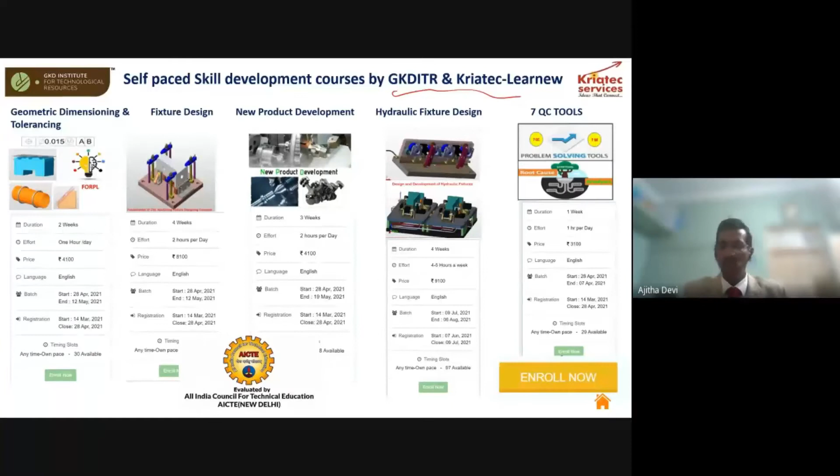Again, for the benefit of people, we are just trying to show you all this. We jointly work with GKDITR, and we can help you move around the skill sets. That's what GKDITR assures you. And if departments, if you're trying to change over, or want to master the same department, we are here to support you.

We can close in another 4 minutes, and people are still rolling out, and I will also see the answer. Mr. Manokar, thanks a lot. Oh fantastic, see you on the next webinar, thanks a lot.

Any questions, please do ask us, we are waiting. People always say we got only one question. If at the end of the webinar you have any more questions, we are very happy. And if there are none, I'm happy there was at least one question. If no question, either people understood fully or they do not understand anything.

I hope so, everybody, I take it in a positive way, that you understood everything. In a pessimistic way, people who do not ask questions do not understand - no problem. Any one more question from anybody? We are ready to answer.

Wow, Praveen, 8 out of 10. Fantastic, wow.

Ravi, yeah maybe keep rolling, we'll still wait for a few more minutes. Bala, whenever you want to conclude, you can conclude. We are through, people are still popping in, I hope the link is still open. They can do that, and if there are any more questions we can keep asking, we are ready to answer. Any one more question?